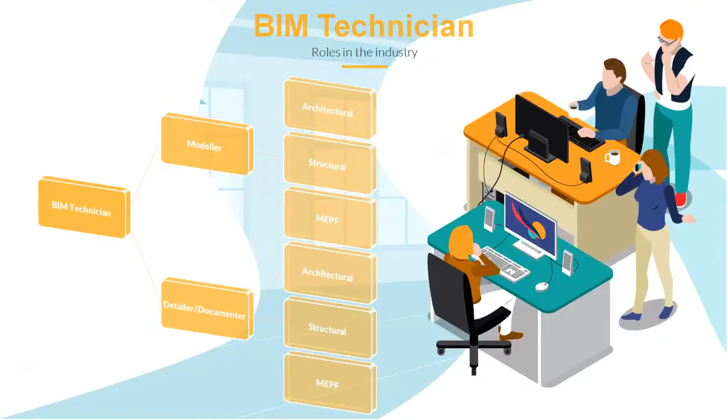First, we have your beginner BIM professional, the BIM technicians. As we said in our last lesson, they're the equivalent of a draftsman or CAD draftsman for BIM. They can either be a modeler or a detailer and documenter. For larger companies, detailers and documenters can also be two different jobs. They work under a specific discipline, some general examples being architecture, structural, MEPF, interiors, construction, fabrication, etc.

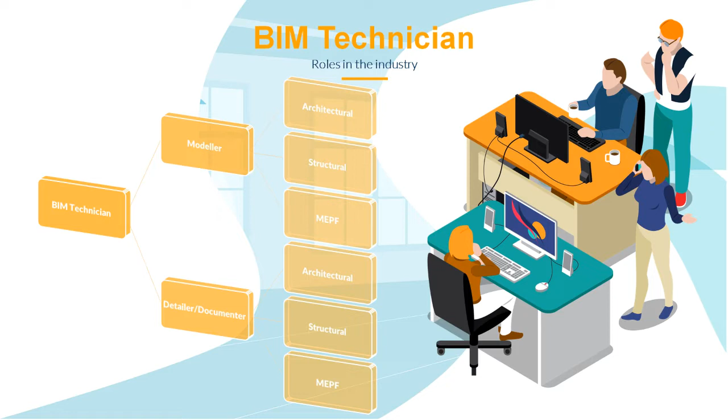Your BIM technicians are directly guided by the BIM designers they're assigned to, and they have different tasks depending on where they're assigned. For the modeler, for example, they're responsible for modeling the project. They have to make sure at all times that all entities in the model are complete. They also maintain the cleanliness of the model and ensure no unnecessary lines are left, especially in the model views. Even if the models go through QA by their designers and managers, they still have to make sure everything is modeled correctly and that they're using proper standards to avoid rework.

As for the detailers, they generate and draft detail and drafting views. They're in charge of anything that needs manual detailing and drafting, like legends, notes, and some construction or fabrication details. For some projects, we choose not to highly detail the model, so in those cases we just put some of these details manually inside the BIM software. The detailers are also in charge of detailing the sheets and views to prepare for the final drawing sets.

Now, for our documenters - they're responsible for documentation and information input in the model. For example, if the designer would like some data embedded in a specific object, like if an electrical engineer would like specifications on a light bulb embedded in the light bulb object, such as manufacturer, brand, wattage, lumens, price, etc. The documenters are also in charge of generating the required views for documentation, such as floor plans, elevations, and sections. They also prepare the data schedules and complete sheet sets. Again, all this is done under the instructions of their designated designers.

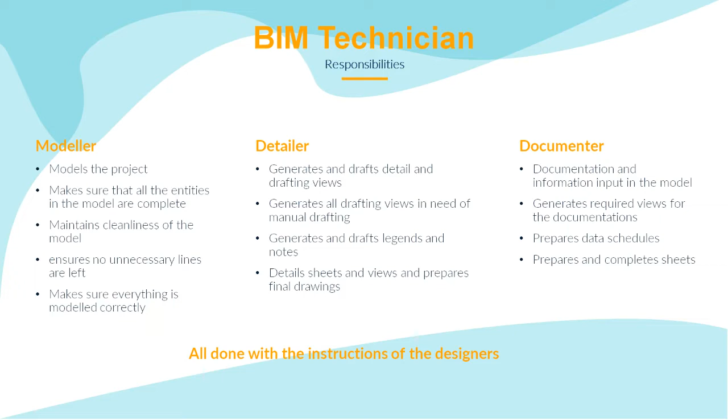Now let's go to our BIM designers. BIM designers are the architects, engineers, and designers in the project, so their roles depend on their design disciplines, such as architecture, structural engineering, etc. Their responsibilities are still that of the traditional designers - it's only the tools and workflows that changed, plus some additional tasks on standard management.

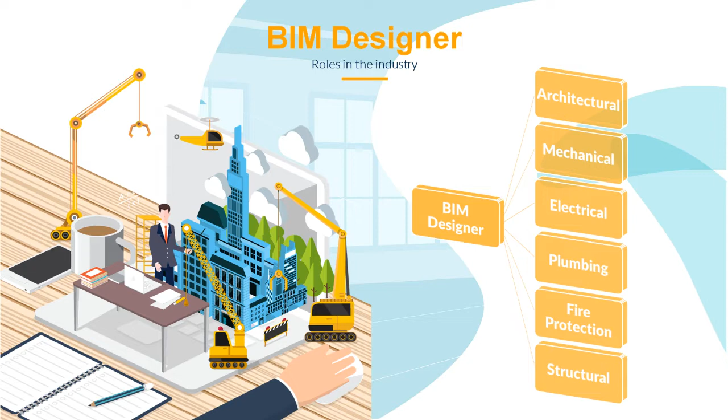Here's a sample of some of their tasks. They're responsible for design and conceptualization, material specifications, and developing and documenting details to communicate design intent. They have to work with others - meaning other team members and stakeholders in the project - to define the scope of work. They have to communicate the project goals and milestones, and exercise skills of persuasion and negotiation on design issues, especially when dealing with clients.

They also have to manage the BIM technicians and assign tasks to them, and make sure models are correctly done at all times. They have to validate BIM models, check for interferences and clashes, and revise coordinates accordingly. They monitor quality control for the programs, and provide over-the-shoulder training, developing, and shadowing to BIM technicians. They also prepare design renderings, sketches, diagrams, schematics, and working drawings to illustrate design solutions. They follow project development and production standards, and coordinate with BIM technicians to prepare technical working drawings.

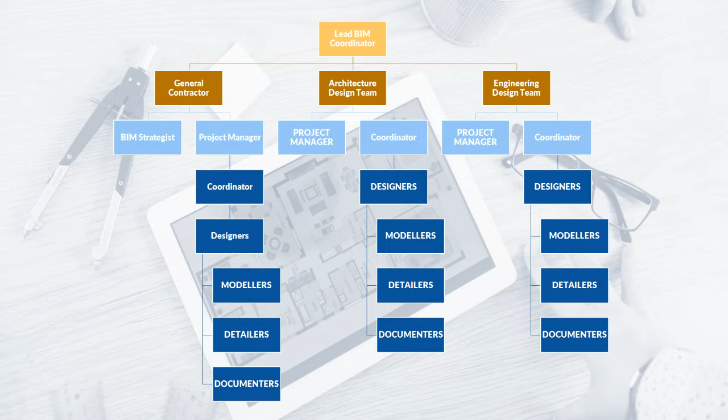This example is mostly for larger projects. That's why there are more members.

And here are some other examples. On the left, you'll see a hierarchy of a design and build firm when they handle a project all by themselves. In the center, there's a sample of a single discipline firm. There are also times, as you can see on the right, when the designer themselves is the project manager, or they're also handling collaboration. This is mostly for smaller projects, like residentials or low-rise commercial buildings.

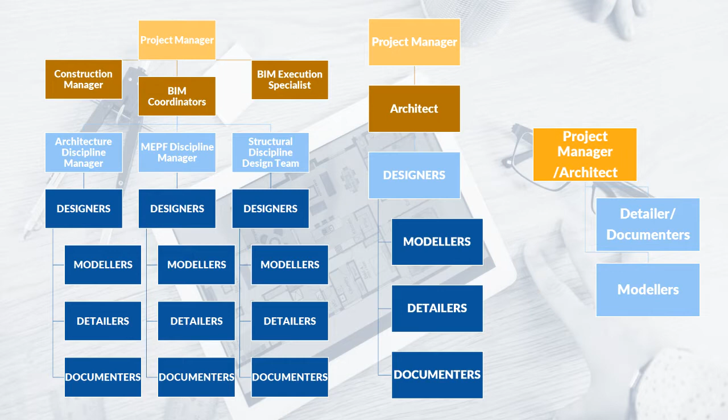We'll talk more about how teams are formed in our last lesson, but for now, let's talk about the softwares.

There's a myriad of softwares in BIM, and honestly it's not like when you just had CAD where you didn't have to choose from so many of them. It can feel a bit overwhelming if you're new to the game. In BIM, different softwares solve different problems. Some do very specific tasks very well, and some are more multifaceted with the capability to multitask.

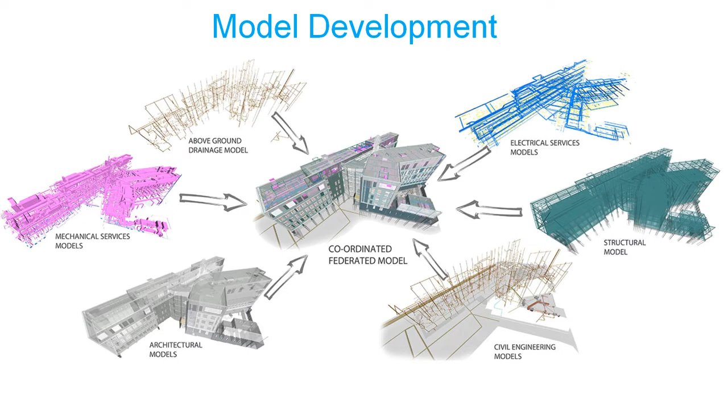So let's go see a list of all of them depending on their main use. Some of these have multiple capabilities, but I focused this list on the software's specialty. First, for BIM execution planning, these softwares help the workflow for planning the BIM project execution. You have here LOD Planner. Usually LOD means level of development, which we're gonna talk about later.

Next, for content management, in BIM it's not just lines and geometry. We also have objects or components. These can be preloaded with manufacturer data or custom made for projects, and for that we need content management softwares. Some prefer not to use them, but for larger projects I advise using them since it gets tricky to handle manually. Also, a lot of these softwares connect you to manufacturers where you can download BIM component models of their products, which also makes for accurate designs. For this we have Unify, Avail, BIM Object, BIM and Co, and MagicCAD.

And now for BIM modeling. These are the main softwares we use for BIM, although there's one here that's not really fully BIM capable, which is SketchUp. I don't really advise using this unless it's just for schematics, because of its limited capability in embedding information. Anyway, the others in this area are Revit, BricsCAD, Rhinoceros, Dassault Systems, SolidWorks, ArchiCAD, CATIA, Tekla, Allplan, Bentley, and Vectorworks.

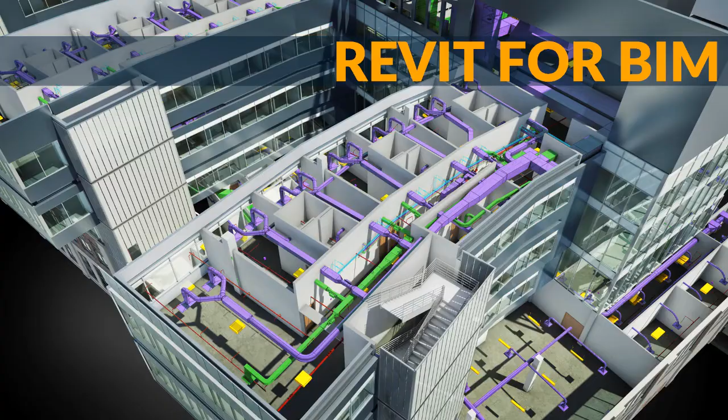Anyway, as you saw, I have a particular preference for BIM—for Revit, I mean. So let's talk a bit about it.

I like using it because it's multidisciplinary. It has tools for every discipline, from architecture to structural to MEP to construction—Revit has it. It has the best interoperability in my opinion, and they develop tools to expand that further. Every year they bring out more and more interoperability tools so you can use a lot of different BIM software with it without hassle.

It's also multifaceted, so you can run Revit for many BIM tasks. For small to medium projects, you won't even need to use other software—you could just buy Revit and go along with it. It also has great value for money since you're able to use it for many different tasks. You save on buying many different software for different tasks. These software are not very cheap, so it's good that you have value for money in one of your chosen software.

It's also very efficient. A lot of BIM tasks in one software makes the work easier since you won't have to switch here and there too much. And it provides great cloud collaboration. Autodesk provides the best options for cloud collaboration—they have lots of tools that would connect you to the project no matter where you are.

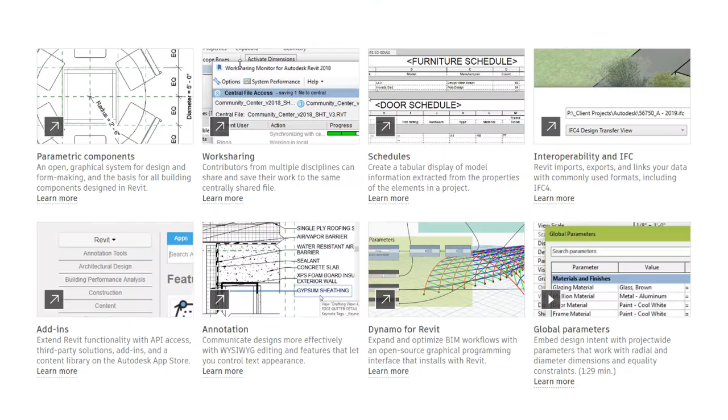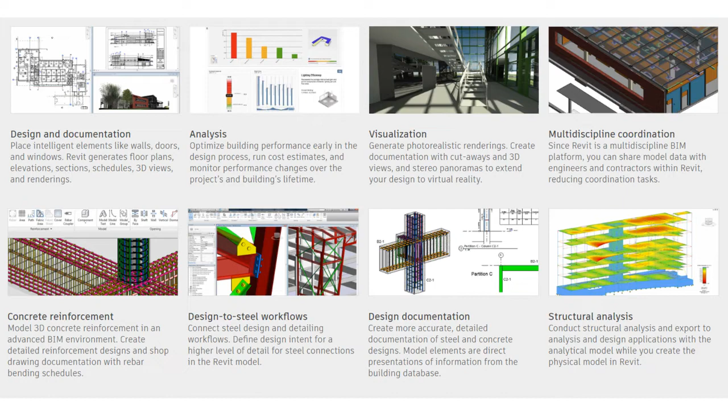Here are some functionalities of Revit in BIM: we use it for design and documentation, analysis, visualization, multidiscipline coordination, concrete reinforcement, design to steel workflows, design documentation, structural analysis. You can also use it to make smarter decisions.

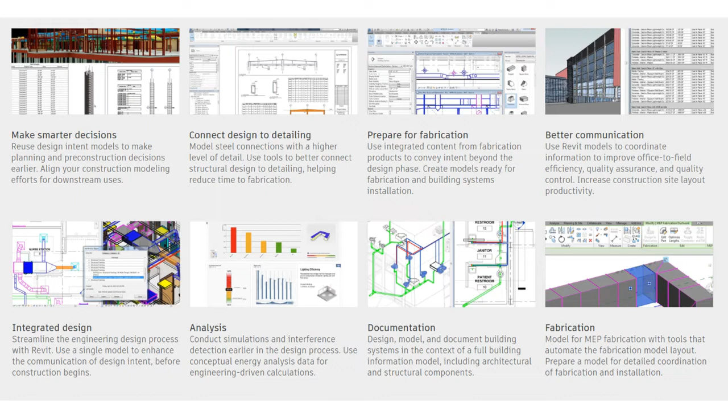Connect design to detailing, prepare for fabrication, for better communication, integrated design, analysis, documentation, fabrication.

So let's go to our next subject: the concept of BIM maturity levels. BIM level compliance has become the accepted definition of what criteria is required for BIM compliance by companies. There are four levels measuring BIM maturity levels of each company, 0 to 3. The maturity levels are the construction supply chain's ability to operate and exchange information.

Level 0 is the unmanaged CAD, including 2D drawings and text with paper-based or electronic exchange of information, but without the common standards and processes. Essentially, this is a digital drawing board.

Level 1 is a mix of 2D and 3D information. It's also known as managed CAD. This may include 2D information and 3D information, such as visualizations or concept development models. Project teams use common data environments here to collect, manage, and share all project data.

Then we have level 2 BIM, widely known as the mandated level, also called collaborative BIM level. Level 2 adds additional dimensions such as time management and budget calculations. The 3D models with project data are shared using a common file type like IFC, allowing them to put together a unified BIM model.

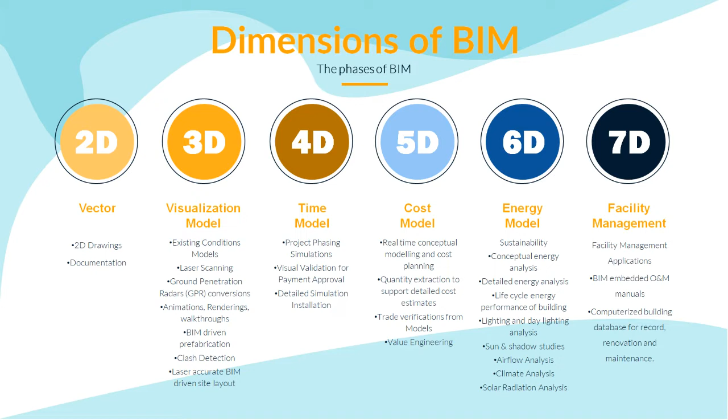And facilities management usually comes from the facility management applications—BIM-embedded O&M manuals, and computerized building database for record renovation and maintenance.

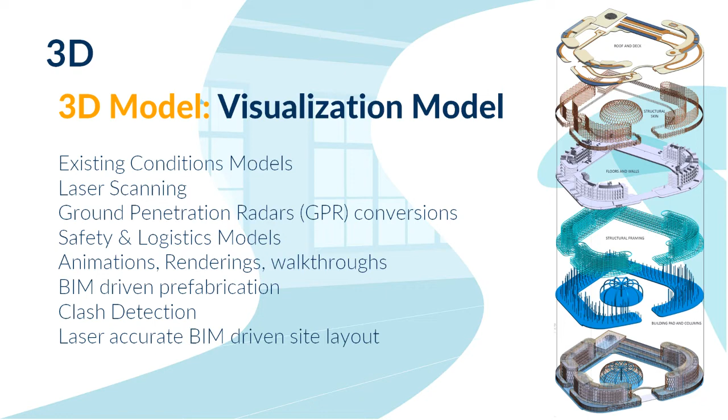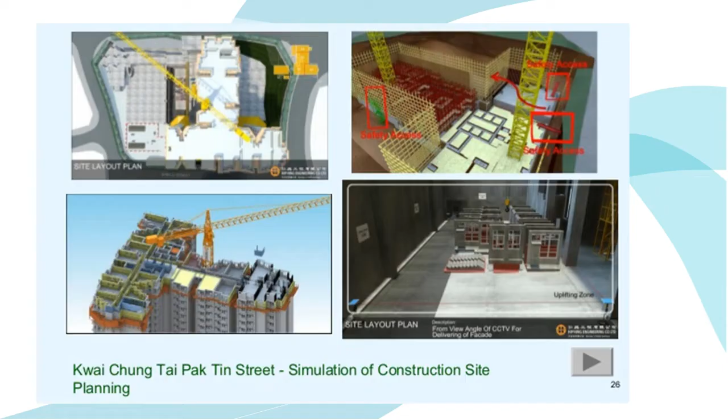For the 3D visualization models, as I said, these are what's included. And the 4D model, the time model, is mostly the construction scheduling or design scheduling. This is the goal of many contractors—everything collaborative, where you can train your workers to use tablets to see your BIM models, so everything is more accurate when fabricating or constructing your building.

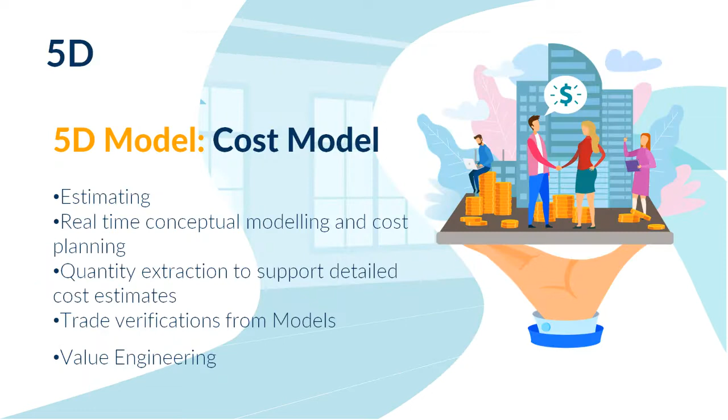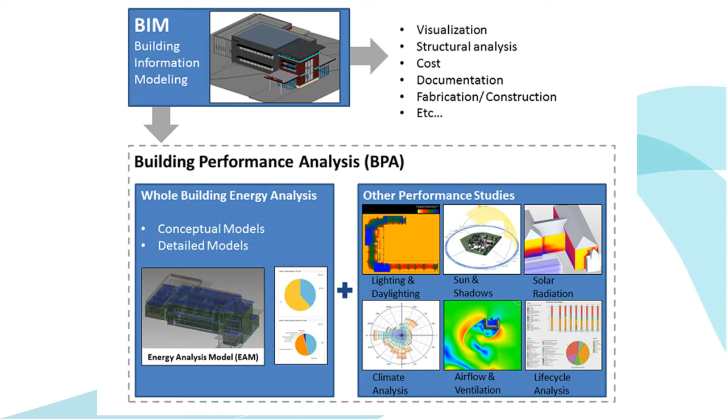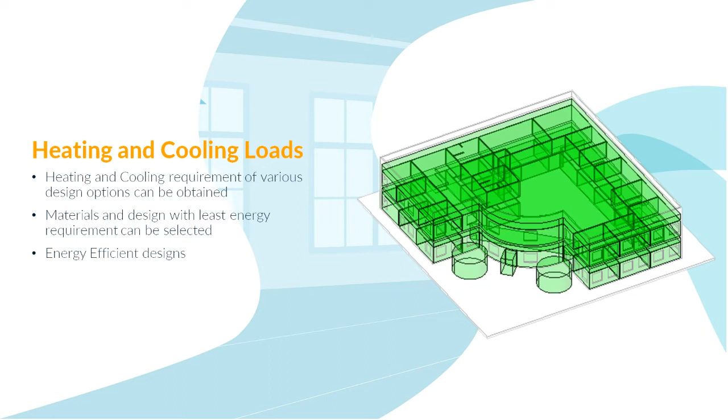Then we have the 5D model, which is the cost model—here we have the estimating. And the 6D model, which is the energy model, includes building performance analysis (BPA), lighting analysis, solar analysis, and heating and cooling loads. Then we have the 7D model, which is facilities management.

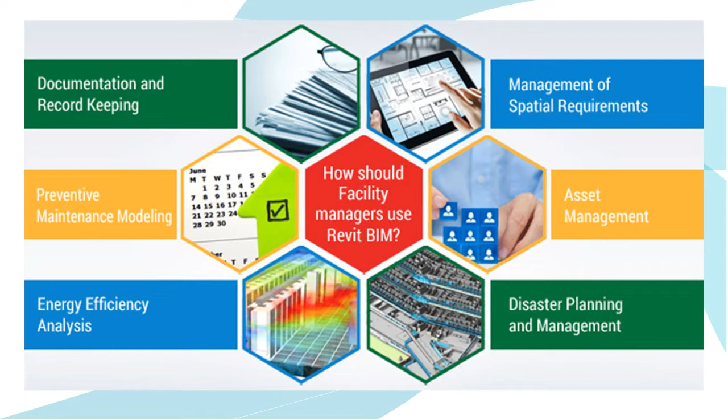Some facility managers don't even have to use other software—they can just use Revit directly. Sometimes we don't even have to turn to other BIM tools; we could just give them Revit, and they usually go with it because it has the same functionality, except it doesn't look as simple from an owner's point of view. But if they usually have the BIM technicians themselves, we just go with Revit for facility management. It makes running a large building easier, especially if you've got future renovation plans.

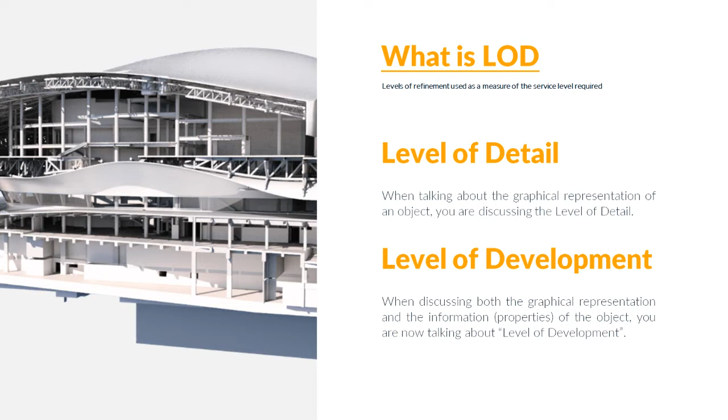Another important aspect of BIM we should talk about is the LOD. It can mean two different things, but it's basically the levels of refinement used as a measure of service level required in BIM modeling. The level of detail is when you're talking about the graphical representation of an object, and the level of development is when you're discussing both the graphical representation and the information of the object.

The level of detail goes by these standards. The most common is the AEC UK BIM protocol, which is graded component creation. For those familiar with CAD, you're probably familiar with this too, because this is mostly what we used before in CAD.

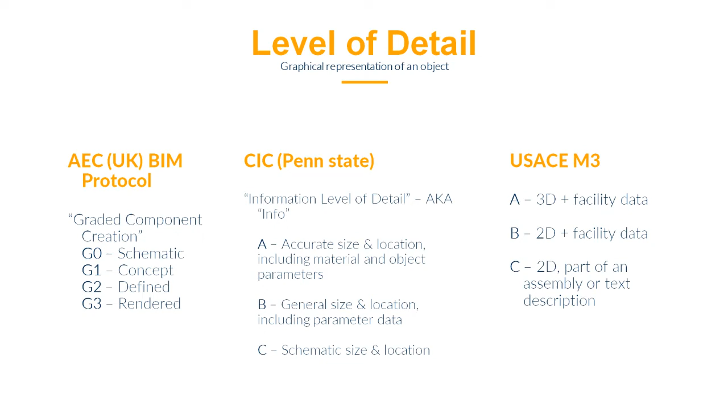For G0, it's a symbolic placeholder representing an object. For the concept level, it's a simple placeholder with the absolute minimum level of detail to be identifiable. For G2, it contains relevant metadata and technical information and is sufficiently modeled to identify type and component materials. For G3, this is the rendered version—identical to G2 if scheduled by annotation, but it differs only in 3D representation.

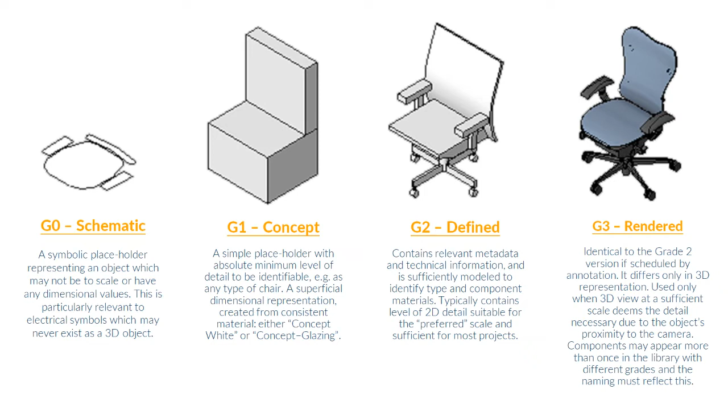Now let's go to the level of development. The level of development measures the certainty, confidence, and amount of information which has been implemented in the model. The graphical representation of the object does not necessarily need to develop with LOD because now the emphasis is added on the information. So LOD may mean for LOD 100 there is a chair or there is this thing.

For LOD 200, there is a chair that has a nominal space requirement of 500 by 500 millimeters, or in general terms, there is a thing about this size. For LOD 300, there is a chair with armrests and wheels, and in general terms, there is a thing with these functions and options.

LOD 400, you have to put in the manufacturer and the model number, or it is this specific thing. And LOD 500, you have to put in the manufacturer, model number, supplier, and the date it was purchased or delivered.

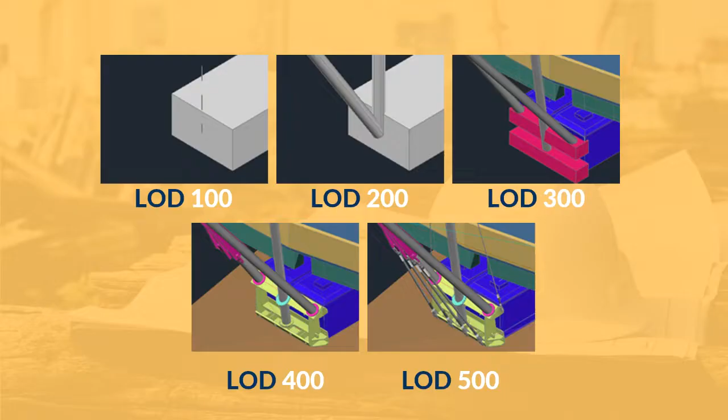So visually, this is what LODs look like for a level of development. For LOD 100, it's usually done in the pre-design when you're just trying to space things out. The model element may be graphically represented in the model with a symbol or other generic representation. Information related to the model element can be derived from other model elements.

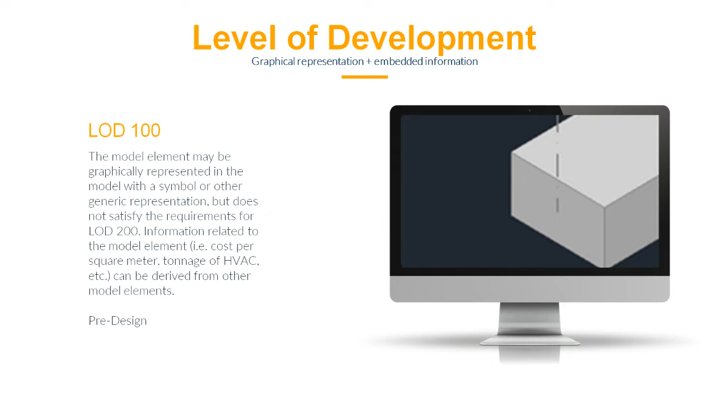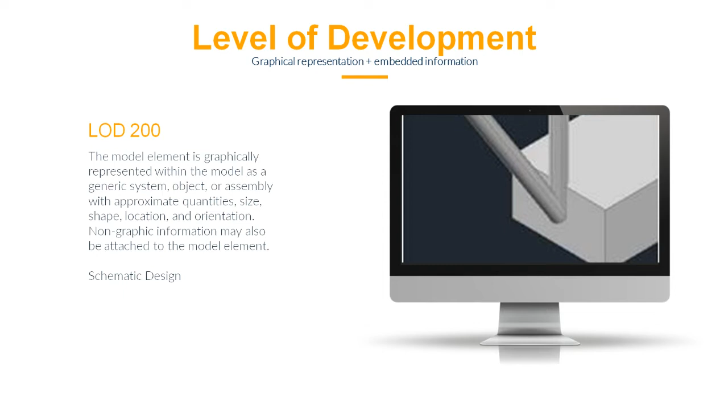Then you have LOD 200. Usually these are the schematic design, this is the level of detail in schematic design. The model element is graphically represented within the model as a generic system, object, or assembly with approximate quantity, size, shape, location, and orientation.

Then we have LOD 300. Well, usually this is used for detailed design where it's graphically represented within the model as a specific system, and non-graphic information may also be attached to the model element.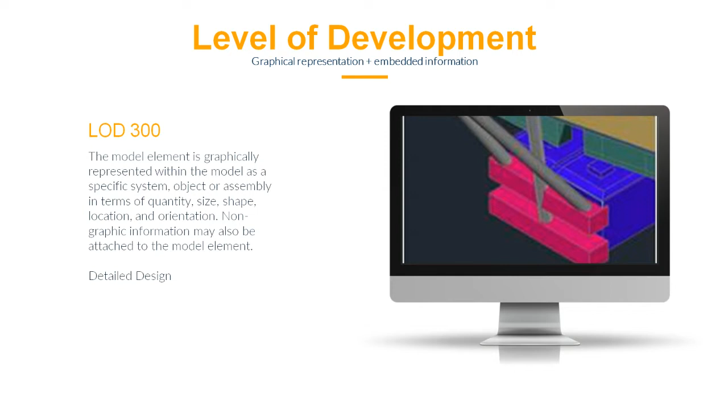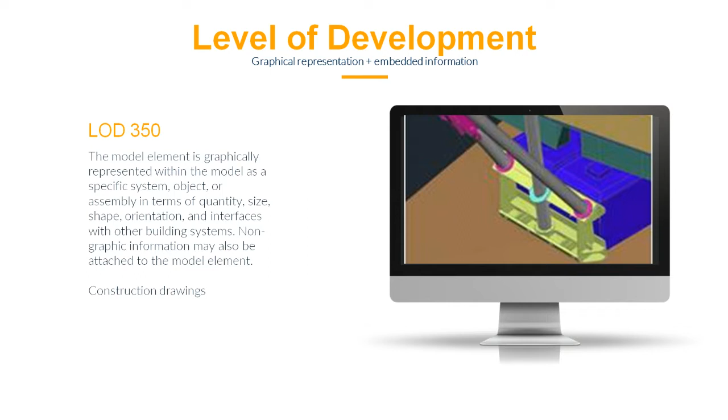Then there is LOD 350. This is for construction drawings. The model element here is graphically represented within the model as a specific system, and non-graphic information is definitely attached to the model.

Then we have LOD 400, which usually we use for implementation documents and fabrication documents. These are documents that are much more detailed in terms of graphical representation and information. So usually this is the point when you can get an accurate cost estimate.

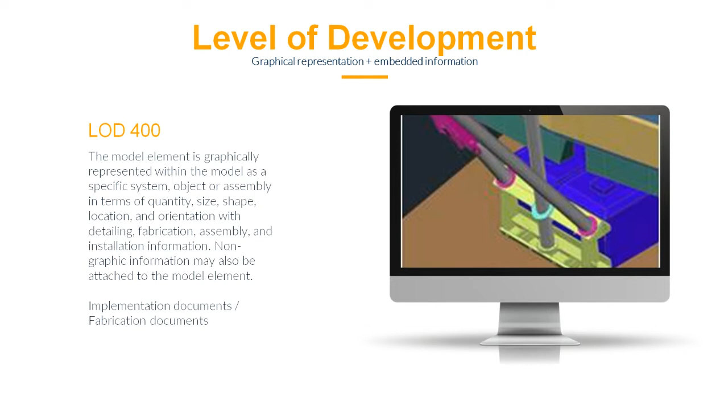Then we have LOD 500, which is the as-built drawings.

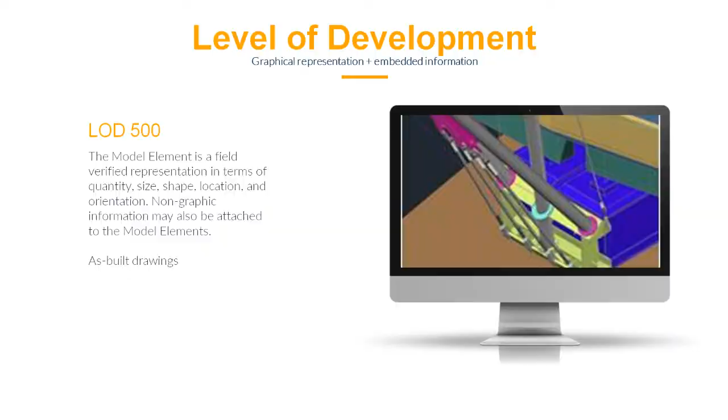Now we're gonna switch to the global BIM. I'm gonna show you an incredible resource made by the BICP, or BIM Innovation Capability Program. They made a map that helps us coaches and new learners know more about where different countries are in terms of BIM integration. Anyway, let's go. Where is it? Oh, here it is.

So if you can see here, you can click these little markers and it shows you an update on where a certain country is with their BIM. So let's try to explore.

So let's see Singapore. Singapore's Building and Construction Authority had a roadmap for BIM that pushed its construction industry to be using it widely by 2015. I actually worked on a project in Singapore, and for them, you're required to do the models in BIM, and you're required to submit your models to the government for permitting. It's not like here in the Philippines where you're just gonna submit the papers. There, you have to submit the BIM models, so they really check it out. They're really specific on that because they also want to make a BIM model of the whole Singapore.

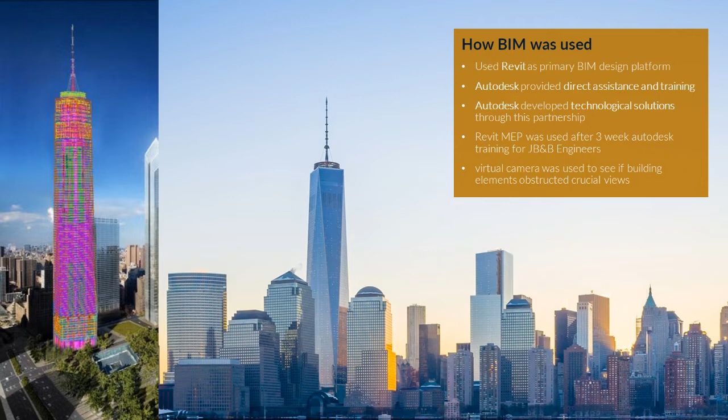One fun fact about this BIM case study is that they used virtual cameras in the model to see if building elements, particularly the columns, blocked crucial views.

As for the impact, here are some feedbacks straight from the designers themselves, taken from that time.

Traditionally, in the construction document submittal process, we spend an enormous amount of time on quality assurance tasks. But with Revit architecture, we can bring the 3D production model into the conference room, a place where it never existed before, enabling us to spend more time on collaboration and design and less on the process of coordination.

We used to gather around drawings on the table with a box of red pencils whenever we had to coordinate very complex or tight-fitting areas of the building, such as the lobby or mechanical room. Now we can open the model on a plasma screen and zoom right to whatever area we're working on. Instead of highlighting an issue in red marker and getting an answer in a week, we got real-time results.

BIM opened up new methods of communication with contractors and subcontractors, methods that were unheard of a few years ago. We were able to incorporate the architectural model into our structural model and easily see if any clashes exist.

In particular, as a direct result of using Revit MEP, we saw a drastic reduction in change orders—that's where MEP engineers typically lose the most time. Going from a 2D computer-based environment to BIM has really transformed the way we work and made everything more efficient. We're now able to coordinate MEP services right up front with the architect and structural engineer.

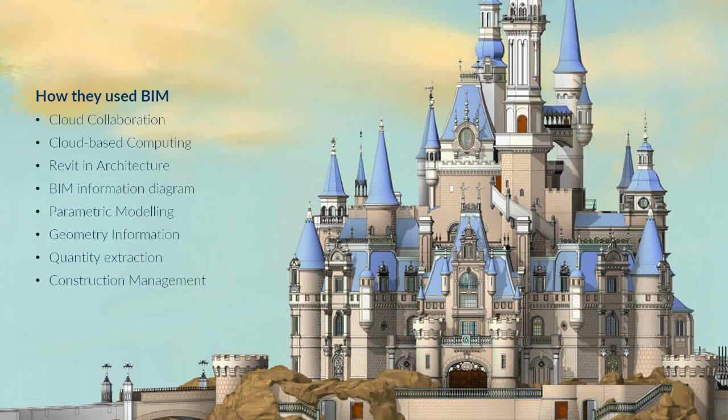As for the impact, it allowed easier collaboration and less rework. The Shanghai Disneyland Resort project had nearly 3,000 clashes identified over a 6-month period before issuing the tendering package, as a result of using BIM. They also got the 2014 AIA TAP (Technology in Practice) Award for delivery, process, and innovation.

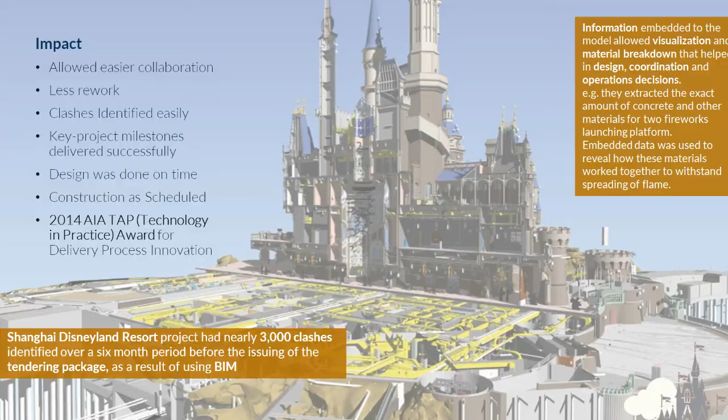And for our last one, this is the Fondation Louis Vuitton in Paris, by architect Frank Gehry. As for the challenge, since this was a Frank Gehry design, you'd expect it to be very challenging, and he delivered. The museum was covered by glass sails supported on stainless steel mullions upon the structural steel and glulam mainframe. It really required complex engineering.